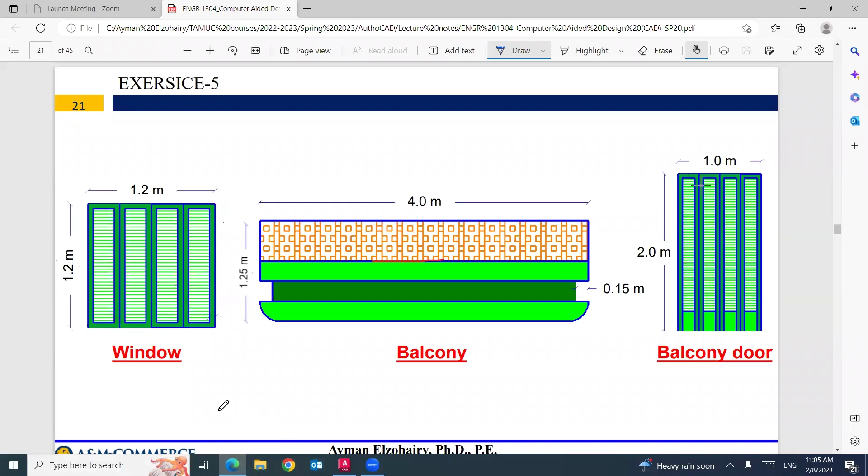So in the previous video, we learned how to use offset and mirror, and we drew this exercise. In this video, I will go through this front elevation of a building that consists of 5 floors. The first time you look at this drawing, it looks hard, or how can I start? But keep in mind, this elevation consists of the window, door and balcony that we covered last meeting. Do you remember?

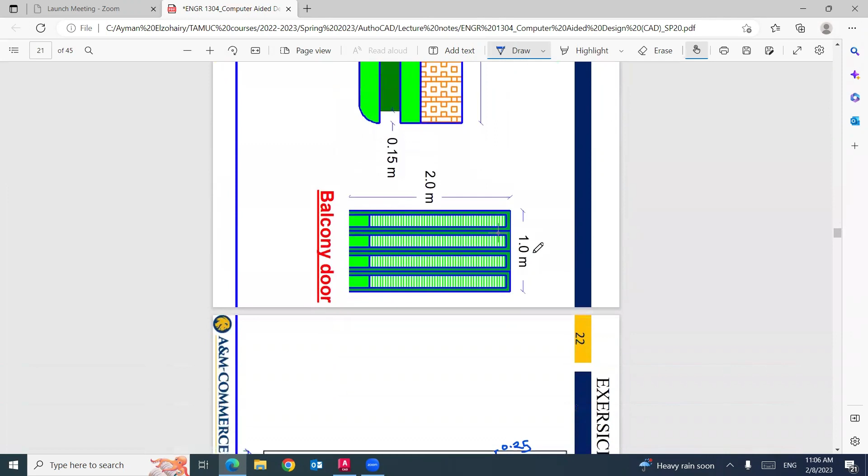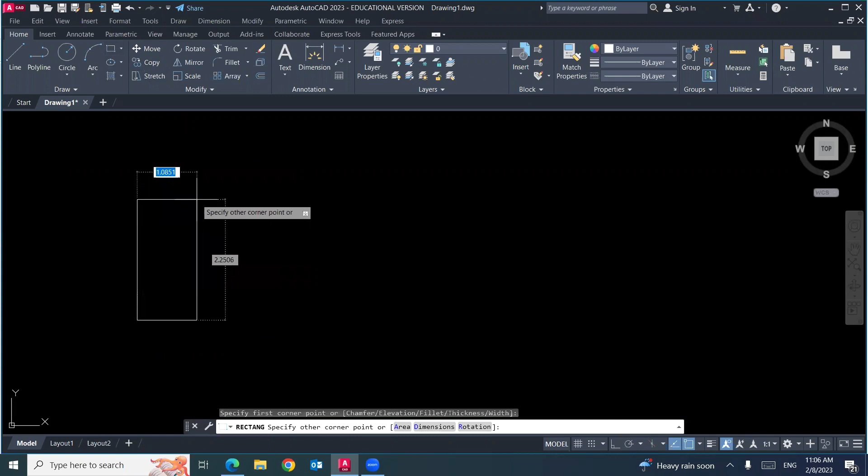In the previous video, we drew this one, this one, and this one. In this video, we will assemble them together. Just make the assembly, and we will create this final product. Let's do a review. Last meeting, we started by drawing a rectangle with dimensions 0.3 by 1.2. I did an offset for this rectangle of 0.05.

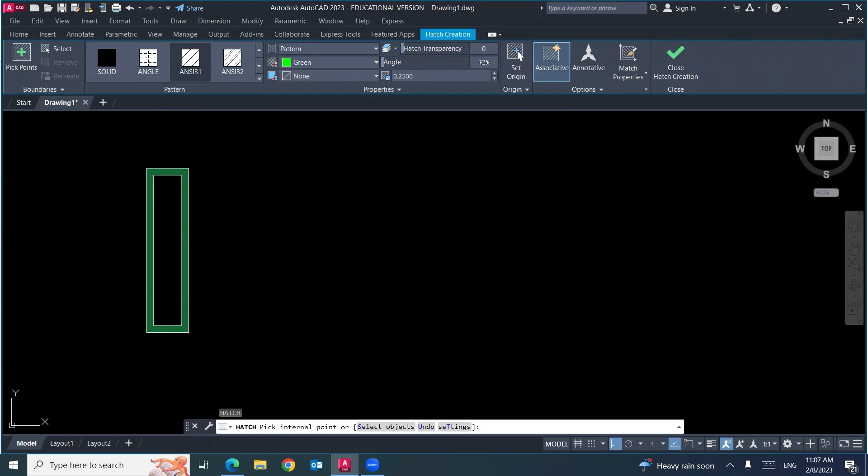I did a solid hatch with a dark green color in between. I did a hatch with inclined lines with a light green color and angle 135. There you go. Then I did copy or mirror. It's up to you how to create the rest of the parts of your window.

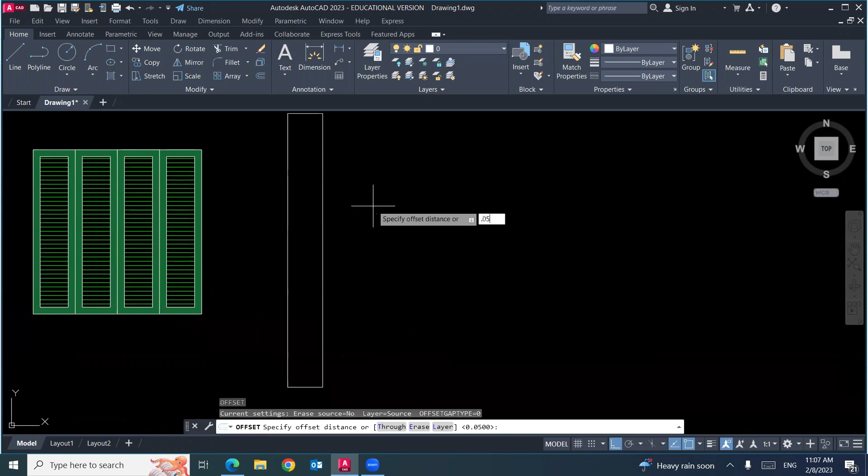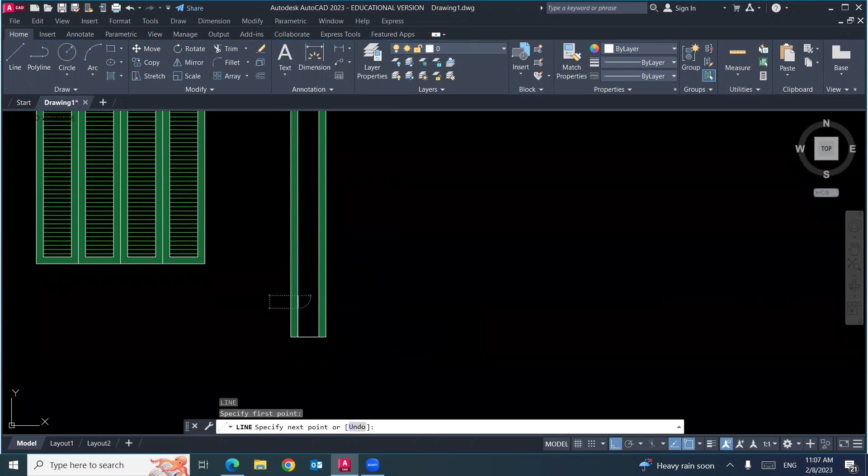That makes sense. I also drew a rectangle with width 0.25 and height 2 meters. I did offset 0.05. I grabbed this part down. I did a solid dark green hatch in between. And then I drew a vertical line here, 0.3, I think, then perpendicular. Hatch one more time, solid light green for this one.

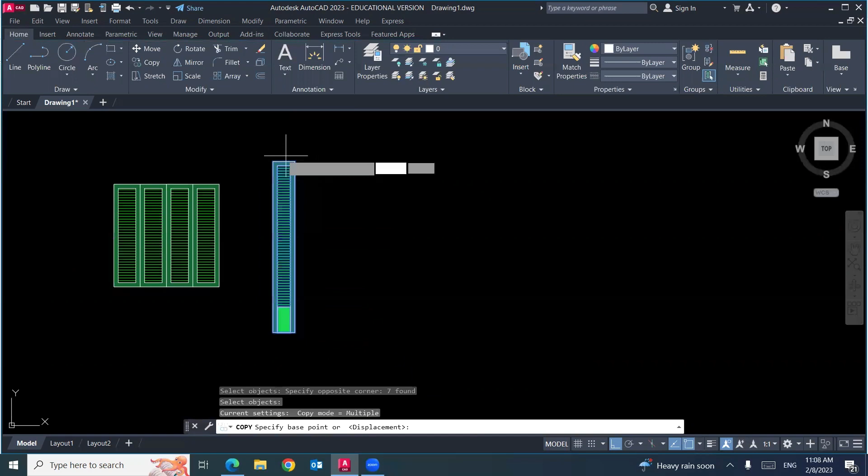Hatch, this is inclined lines, there you go. And I will copy this part 4 times. There you go. For your balcony, I will draw a line with a length equal to 4. I will do offset 0.5. One more offset 0.25 many times, 1, 2, and 3.

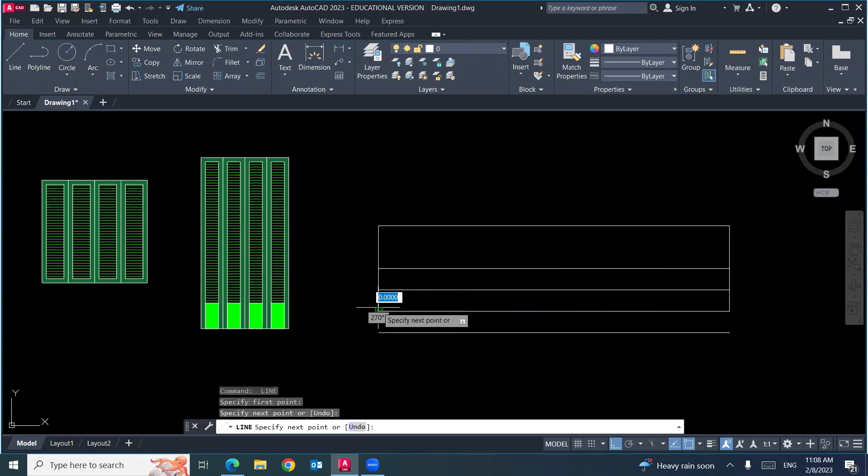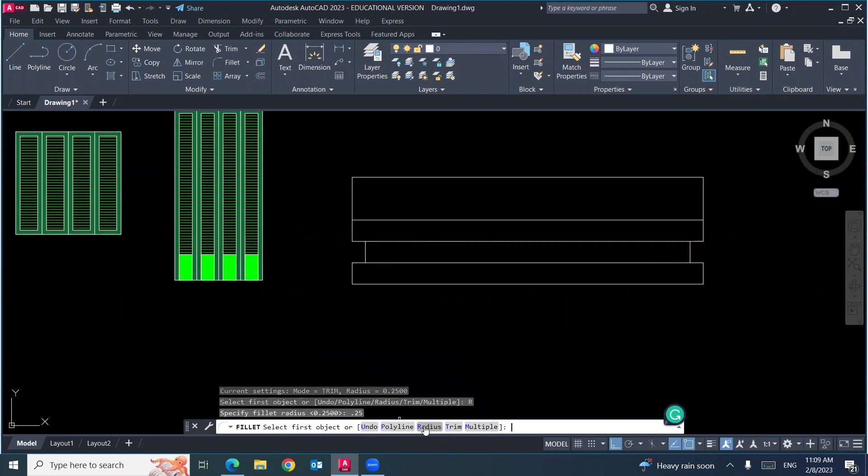I will draw a line until here, another line here. Then I will draw a single line, part of a line here and here, and I will do offset 0.50. Offset this side, offset this side. Then I will delete these 2 lines. I will draw a vertical line here, and fillet it with radius 0.25. I will fillet here and fillet here.

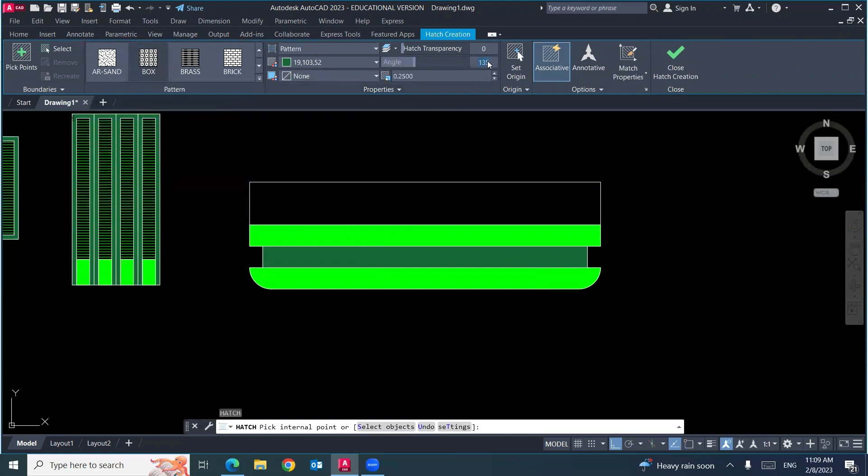Hatch solid. For this one, I can select 2 areas. So I click here and I click here and then enter. One more time, hatch with dark green in between. I will do hatch and I will select the hatch pattern box. I will keep the angle 0, scale 0.25, that's good. And I will change the color to brown. Looks good.

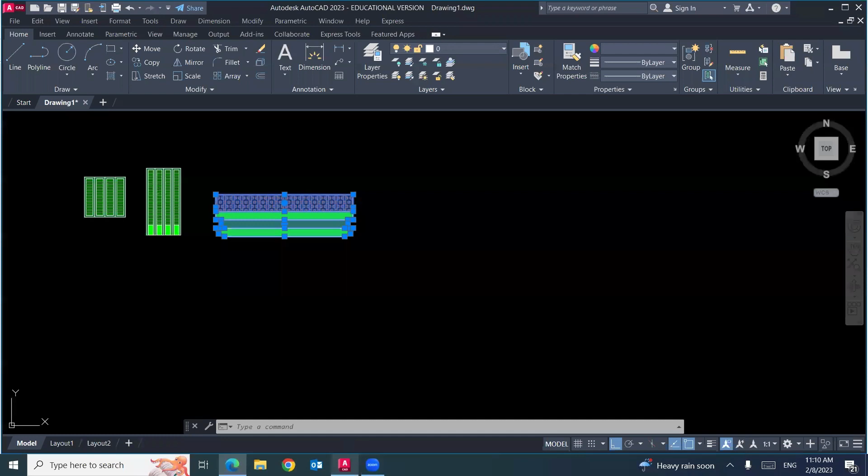Looks good. Guys, for this drawing, I need to draw another one. We have one here and we have another one here. The distance in between is 2 meters. We have different ways. One of them, I will offset this edge line 1 meter. So the distance between this edge line, this line I drew, and this edge is 1 meter. I did an offset for this line of 1 meter. But I said it's 2 meters.

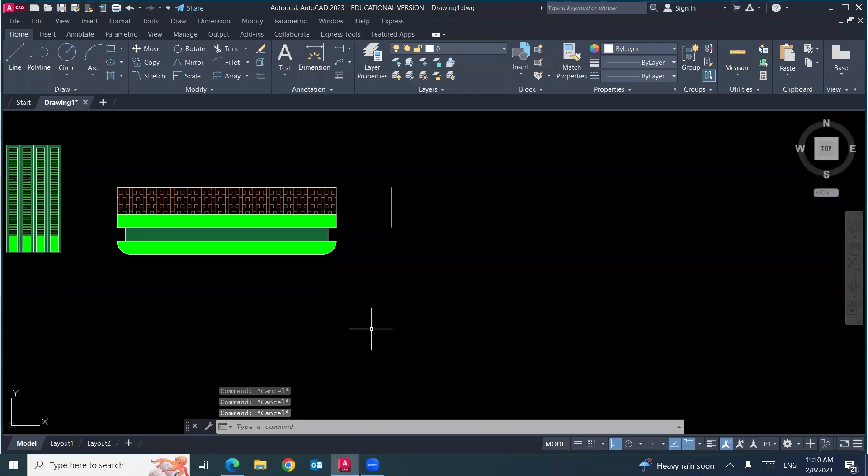Okay. I will mirror this whole object. Enter. The mirror line will be this one. That makes sense? So if this distance is 1 meter, this distance will be another 1 meter. So the total distance will be 2 meters. That makes sense? I did mirror.

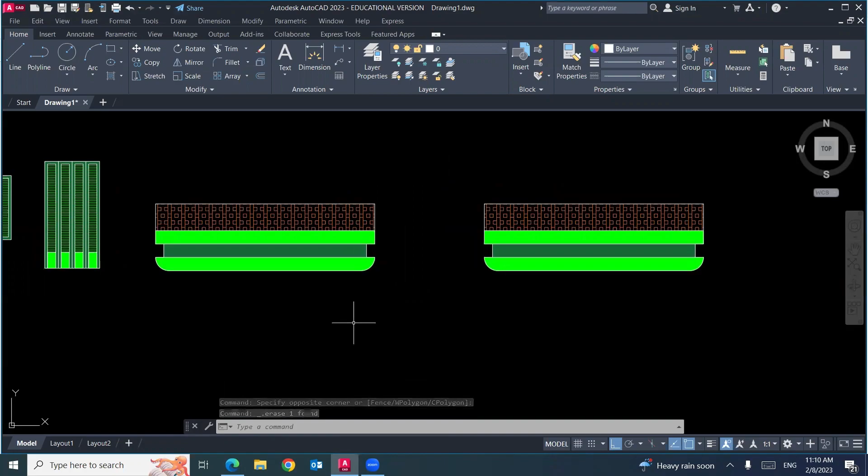In between this edge and this edge, I will locate the window I drew at the midpoint between the two edges. How can I do this? I will draw a line between this corner and this corner. We don't have a line here. Just a moment. I will move this window, and I will catch it from the base point at the midpoint here, and I will move it to the midpoint here. After you are done, delete the horizontal line.

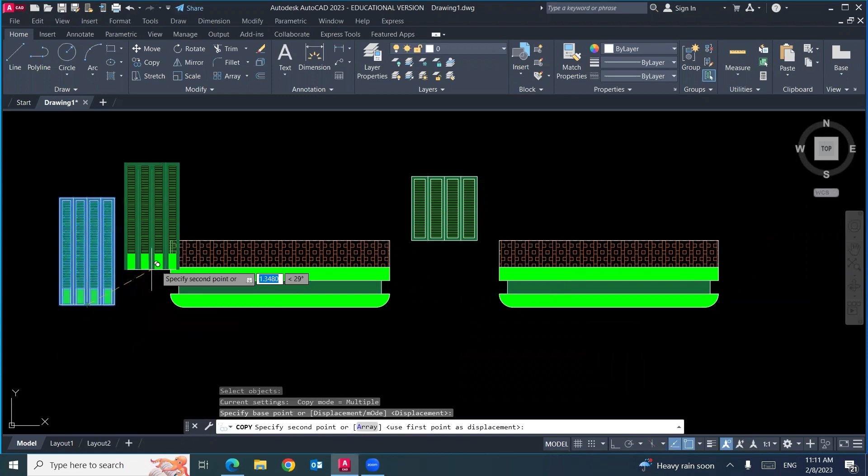I will do copy or move, but I suggest copy. For this door, the base point is here. I will put a copy here at the midpoint and another copy here at the midpoint. I will delete the original one. I don't need it anymore.

So what I did right now, I drew, or I assembled. I didn't draw. I assembled this floor elevation. If you look here, the distance between this floor and the next floor and the next floor is 3 meters. So I will do copy. How many? 3 copies. So I will do copy.

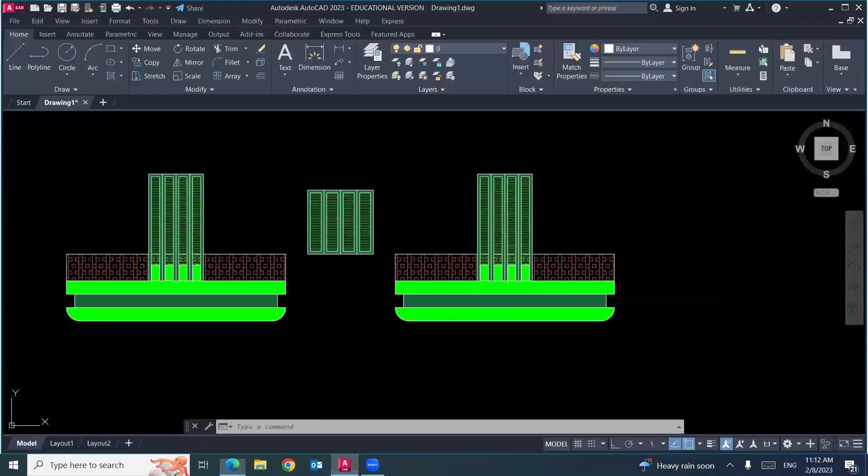Select all of them. Enter. Hold it from here, base point, and go up. Make sure your ortho mode is on to make sure it's vertical. 3, enter. 6, enter. 9, enter. 12, enter. Skip.

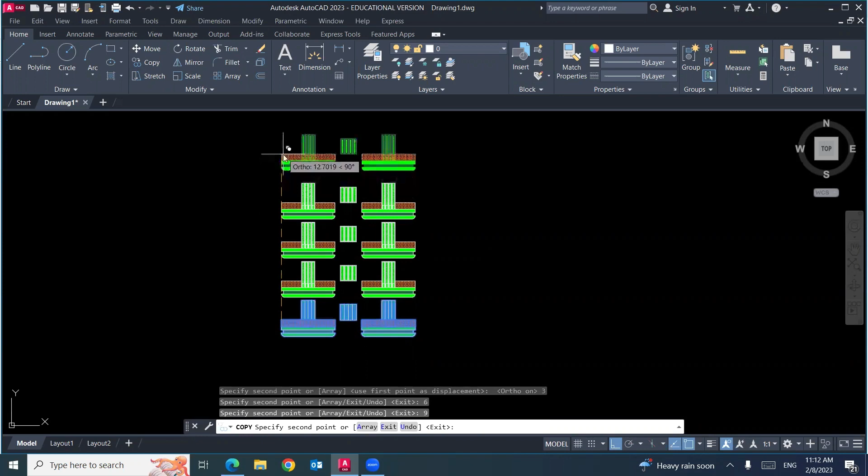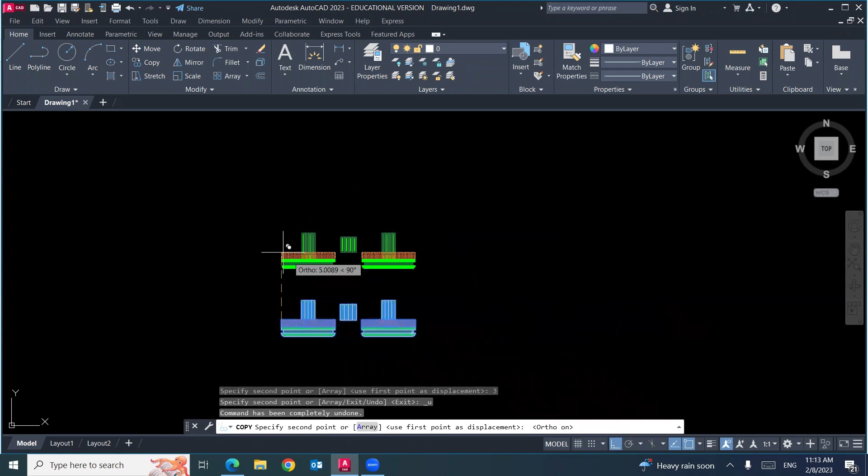I draw 5. 1, 2, 3, 4. It's only 4. That's fine. We can undo, repeat it, copy. From here, 3, enter. Oh, wait. Make sure the ortho mode is on. 3, enter. 6, enter. 9, enter. I'm done.

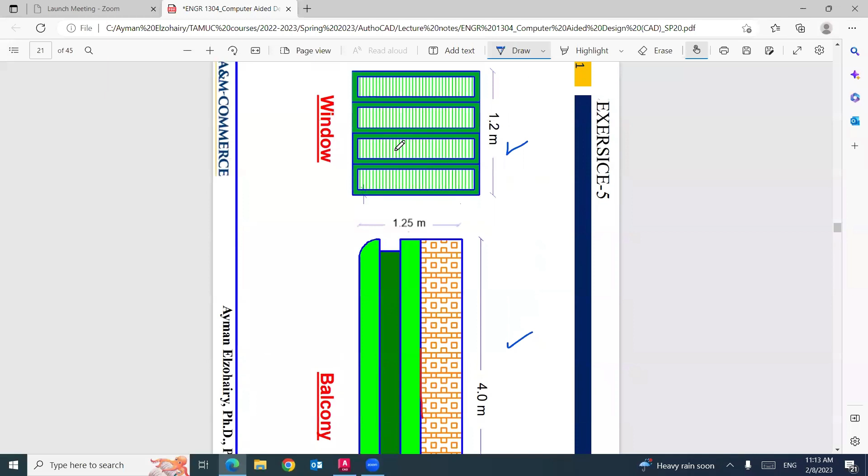Can you see? So if you go here, wow, looks beautiful. It's very simple. This drawing just only comes from the previous video. I draw a window alone. I draw a balcony alone. I draw a door alone. And then I assemble all of them together. What I did for one floor will be repeated.

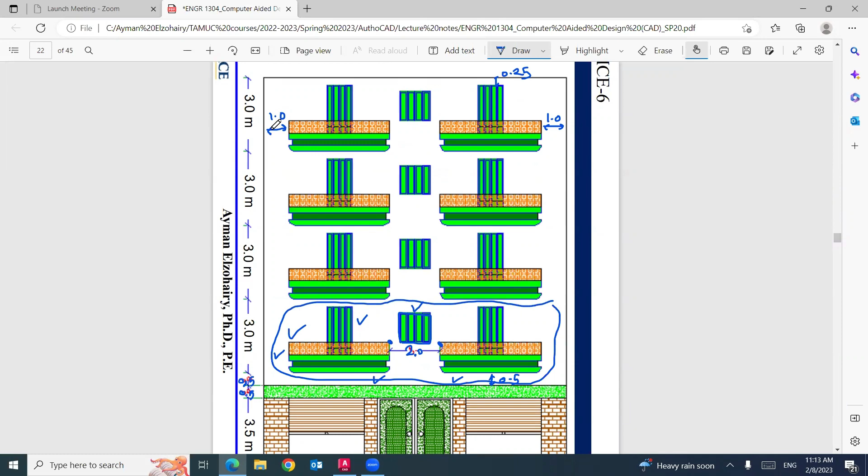So I did copy. Keep in your mind the edge of this front elevation, 1 meter from here, 0.25 meter, 1 meter from here, and the total height from this edge to this edge is 0.5. I can do it very easily. Offset 1 meter from this side, 1 meter from this side. Offset one more time, half meter from this side, and offset 0.25 meter from the top.

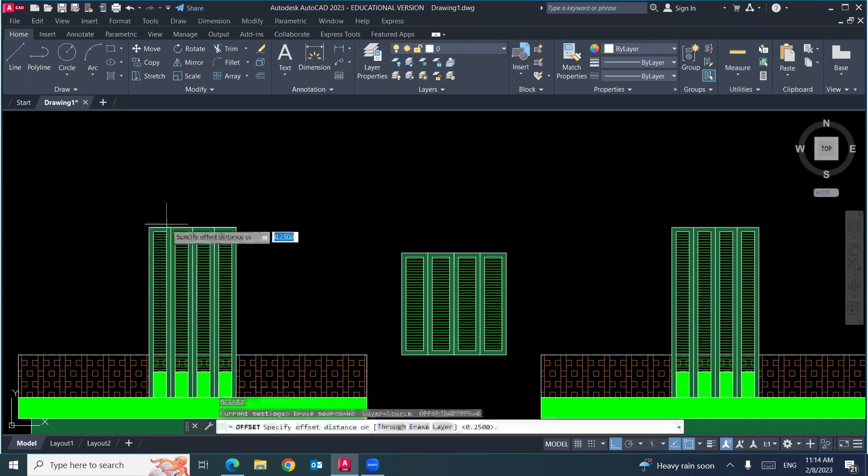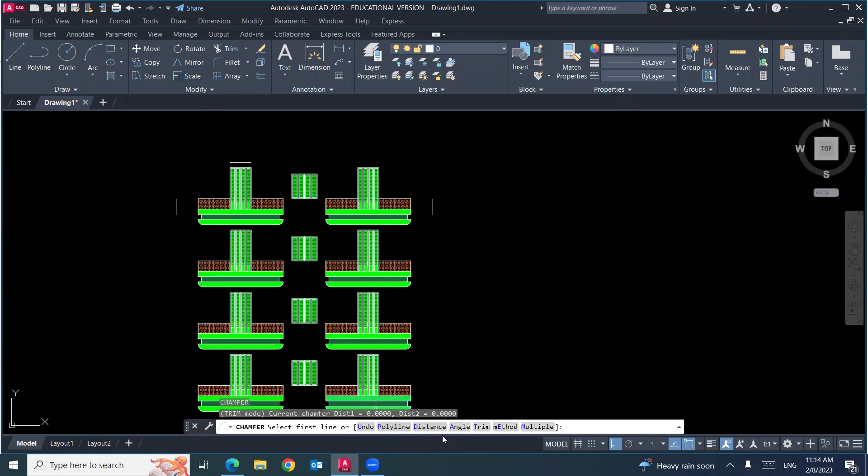We don't have a line here, so we can draw a line to make offset for it because it's drawn as a rectangle. That's fine. Okay, looks good. I draw the edge lines. But how can I connect them together? Chamfer. CHA. Chamfer. And your distance 0, enter, 0, enter.

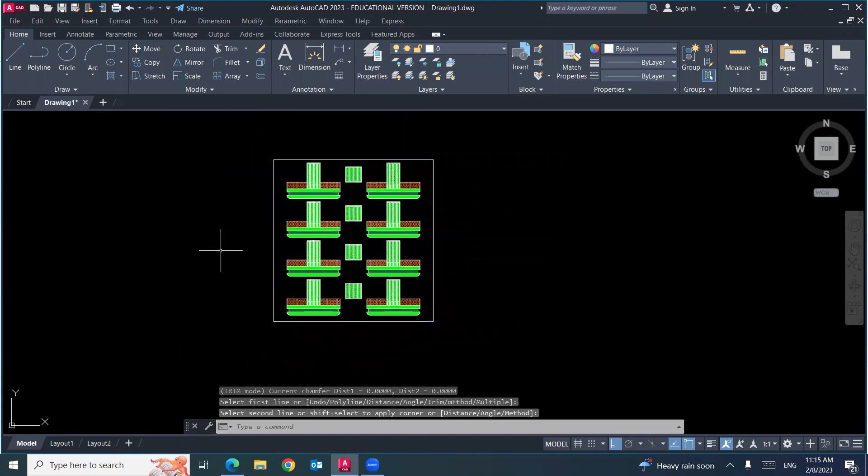If you make chamfer between this one and this one, both of them will be extended. If you make chamfer between this line and this line, here you go. So I kept the distance here 1 meter, the distance here 1 meter, the distance at the top 0.25, the distance at the bottom 0.5.

Let's focus on the bottom floor. I have this line, I draw it. I have another line with a distance 0.5, another line with a distance 3.5, another line here with this little distance 0.25. So I will do offset 0.5, 3.5, 0.25. Offset 0.5, offset 3.5, offset 0.25.

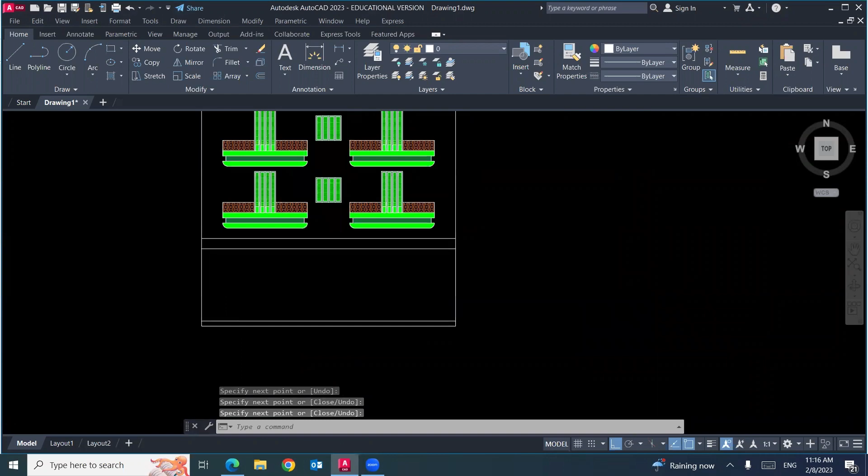Then I will draw the vertical lines. I will draw vertical lines one by one. Okay, there you go. So this vertical line was offset from this line by distance 1 meter. So offset 1 meter for this line. The same here, 1 meter.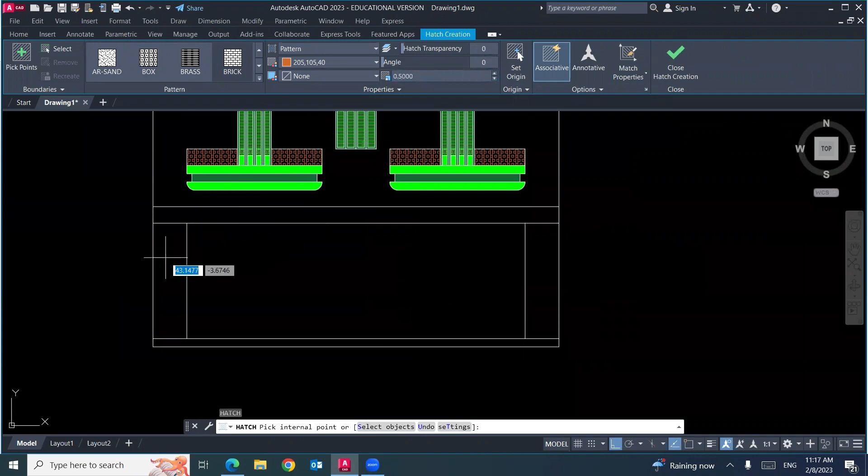Then I will do hatch, brick, the brown, your angle 0. Let's try. Looks good. I will increase this scale 0.5. Make it bigger. Looks good. I will click here and click here. We are done. This side and this side. I will do offset, another offset 3 meter.

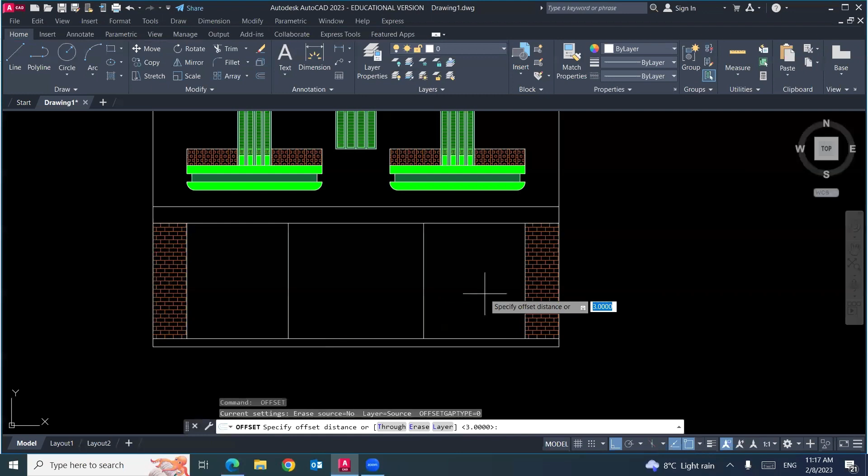And then 3 meter. We can draw it 3 meter. Yes. And then 0.5. You can assume any dimensions. It's not a big deal. 3 meter. 3 meter. And then 0.5. I will do another brick here and another brick here.

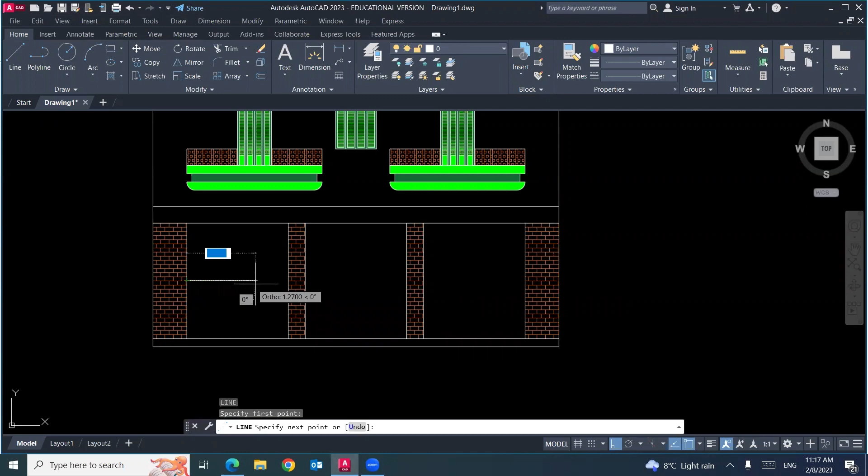We have here a garage door, open the half. So we can just draw a horizontal line like this, make offset 0.1 like this, and then hatch. Your hatch will be the inclined lines, and I will adjust this angle 135. Let's try. Looks good.

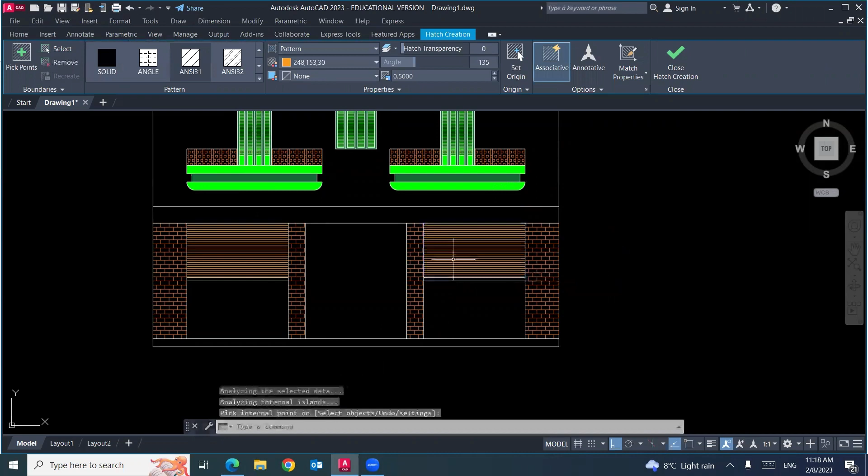If you would like to change the color a little bit. The same here, line, offset 0.1, hatch, everything is the same. Looks good. And this bottom part of the drawing looks like it's the shoulder in front of the building. So I can make it hatch.

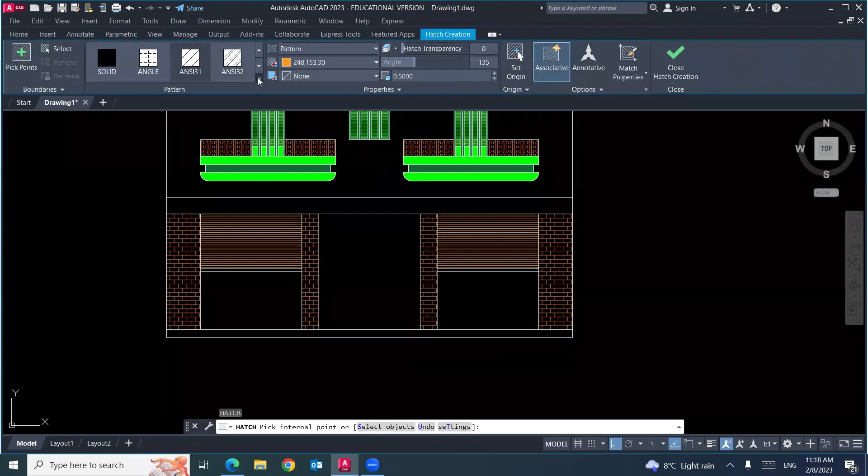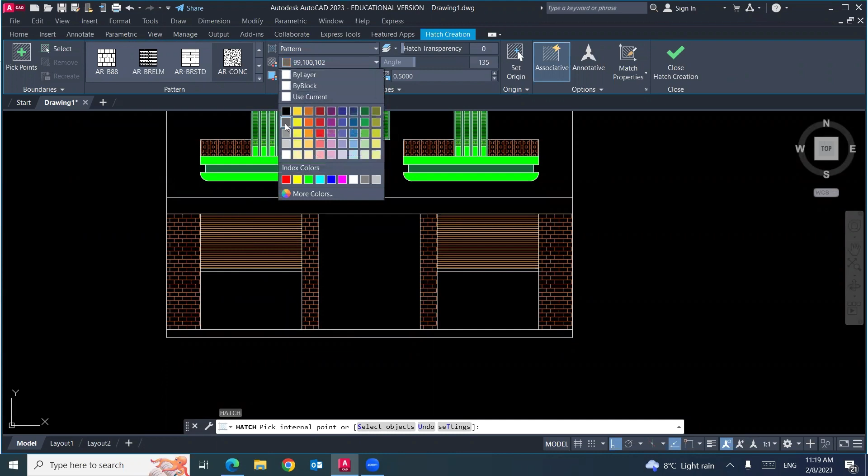And we have here stone. I think we have a stone. No? We should have stone or concrete. We can use concrete. That's fine. And we can change the color to be this one, and your scale will be smaller. Let's see. We can make it smaller, more, 0.01. Let's see. Here you go. Looks good.

Then you can draw this main door. It's up to you. We can draw something like this. This 1.21. Okay, I can try this one. Offset 0.1. Oh my goodness. How can I adjust this? Chamfer. CHA between this line and this line, everything will be adjusted. I am done. I will draw a vertical line here.

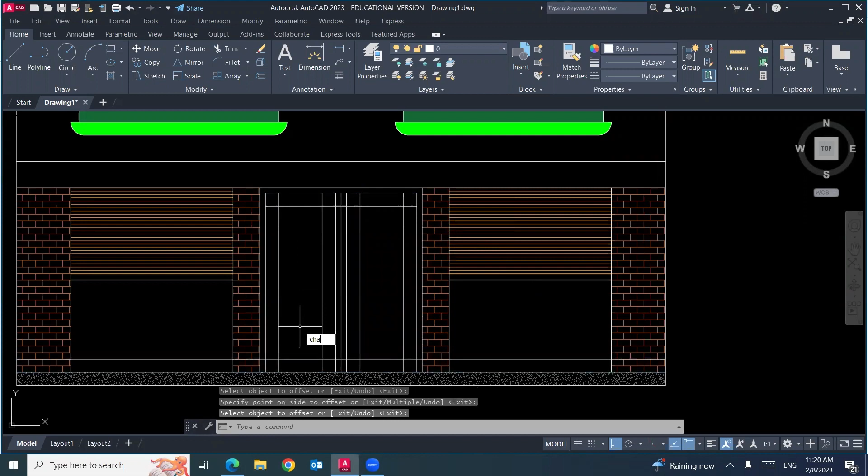Midpoint, and I will do offset 0.1 on this side and this side. Then we can do another offset, 0.25. This, and like this, like this. Oh my goodness, what happened? I can do chamfer to adjust everything.

No? So I will do offset one more time. Chamfer can make these two lines only, these two lines. Also, I can make fillet, the radius can be 0.25 between this line and this line. If you would like to make it bigger, that's fine.

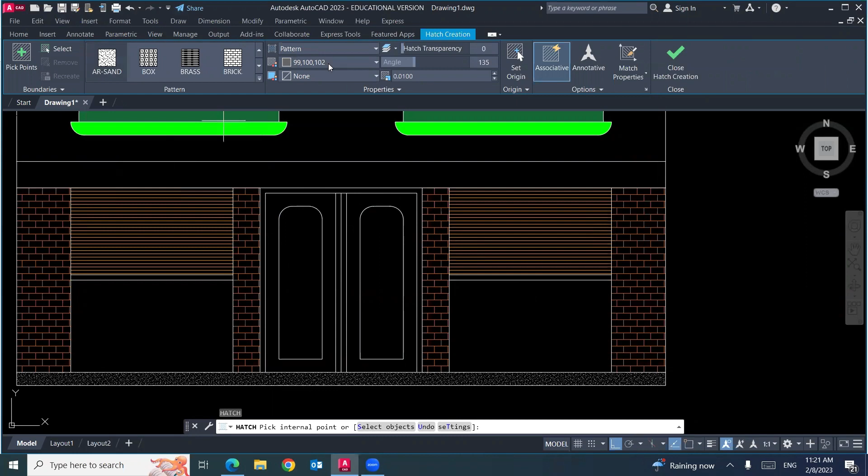I can make hatch for sand. We have here sand, I think. Where is the sand? There you go, this one. And your color can be blue, this shape, and this shape. That makes sense? I did not follow this exactly, but you can do what you want.

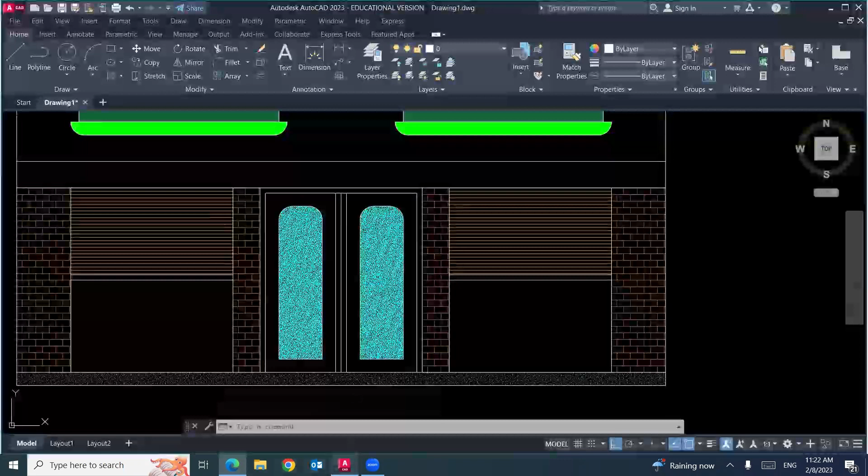Also, I can make hatch for the box. Your angle would be 0. Your color can be brown for the part outside. Oh my goodness, the scale is very small, so I will increase this scale a little bit. That makes sense?

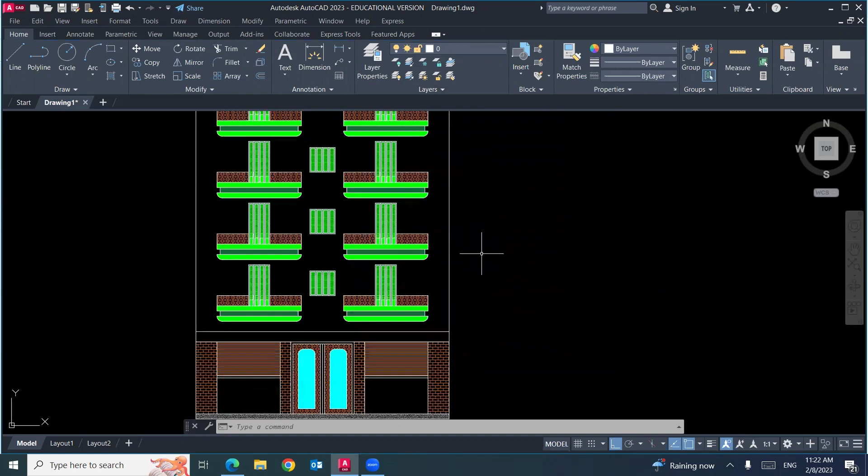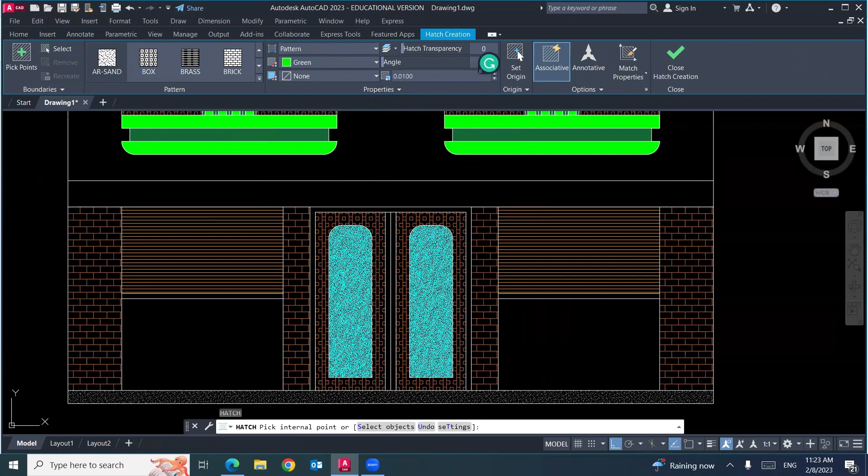Also, I forget to make hatch here. We can make it like sand, make it green. Your scale make it smaller, like this. Looks good. I can extend my drawing to be better.

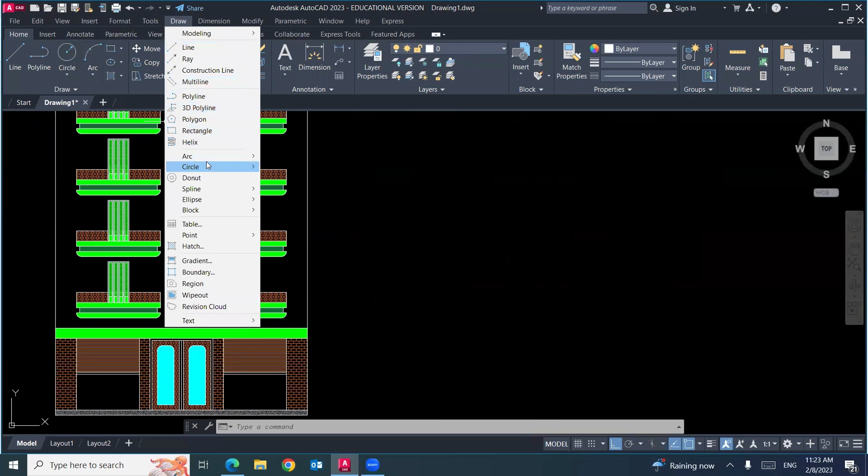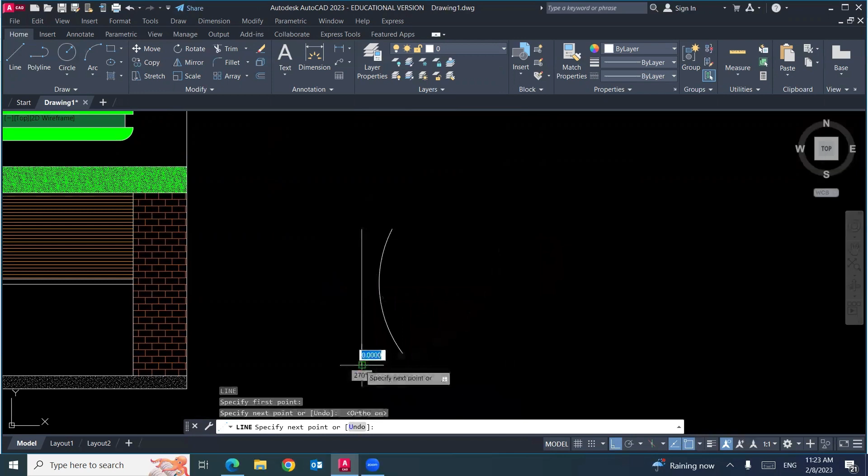Do you remember arc, draw, arc, 3-point? I can draw arc like this. Make your ortho mode off. What do you think about this arc? Just a 3-point. And I will draw a vertical line here. And I will draw mirror for this arc about this line.

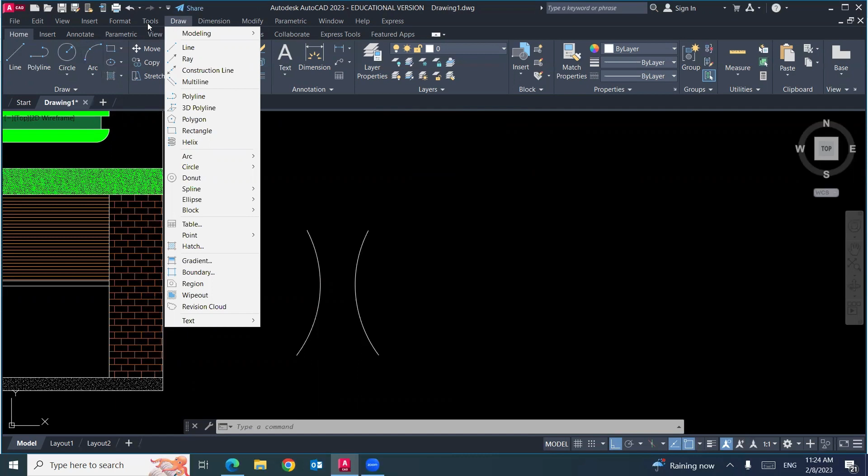That makes sense? So then I will have another cloud, not from here, probably, I cannot remember. Draw. Yes, we can open this little arrow and we have here many options. One of them is the cloud, freehand cloud, like this. Just click everywhere.

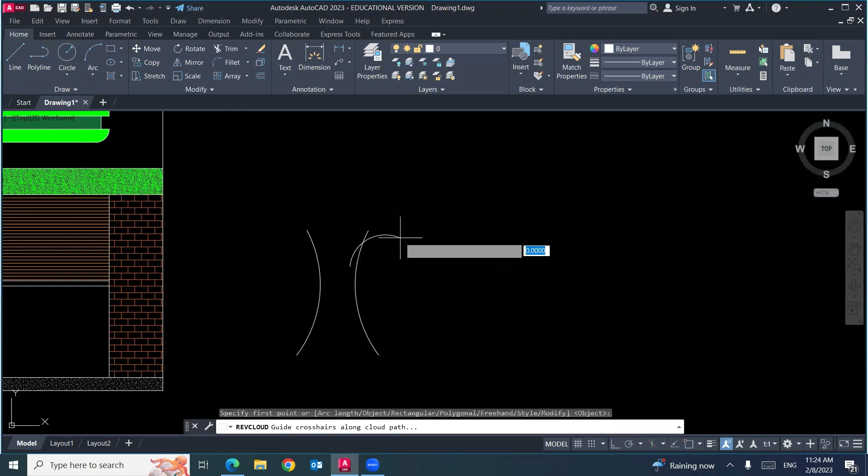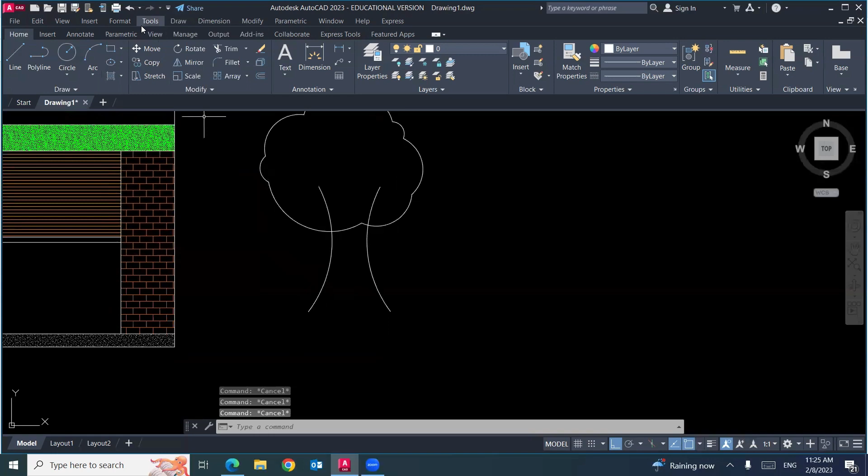That makes sense? So how did I get this cloud? From this little arrow, and I have here this freehand revision cloud. If you cannot find it, just open this little arrow one more time. You can find the freehand. Okay. After you are done, I can draw another arc, 3 point, one here, one here, and one there.

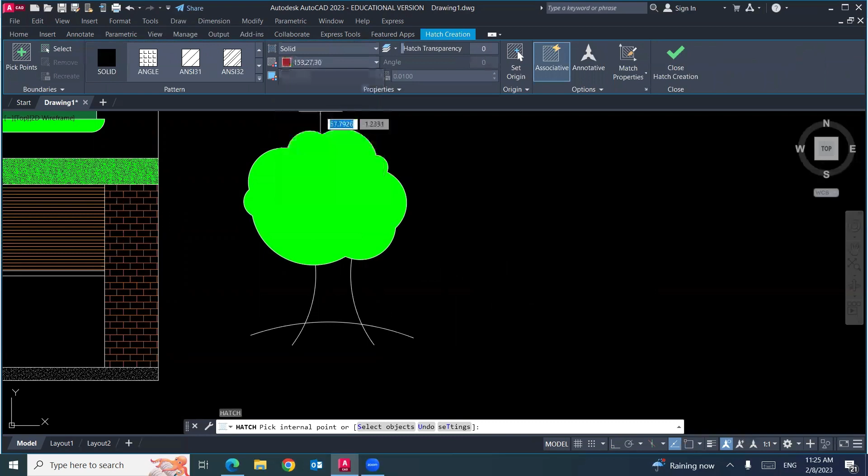So I will do H, enter, solid, light green for this one. I can do H, brown for this one. What do you think? I can do copy for this part and the other. I can move it if you are feeling it's a little above, so I can move it here. What do you think?

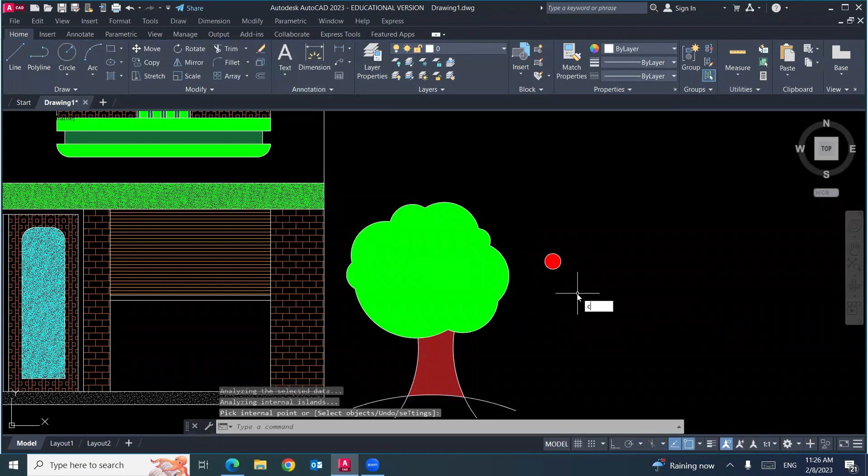If you would like, I can draw a circle and I can do H solid with color red, and I can do copy for this circle with the red to make apples. Just for fun. There you go. So what we learned so far in AutoCAD will enable us to draw anything. Hatch is very important.

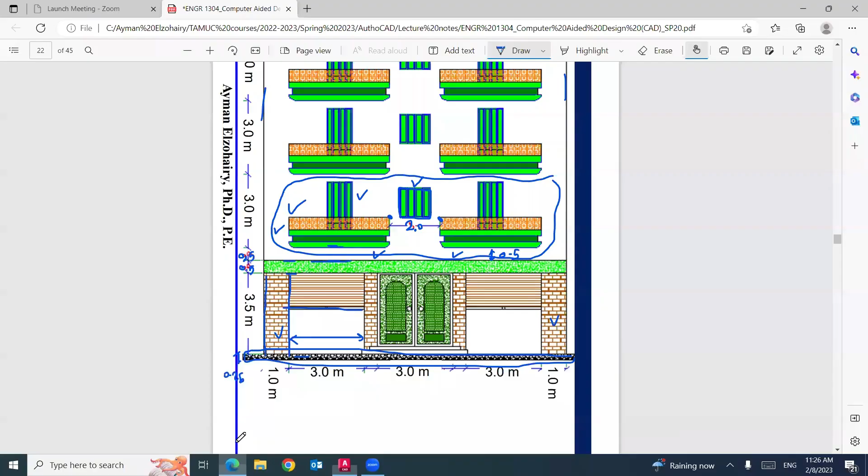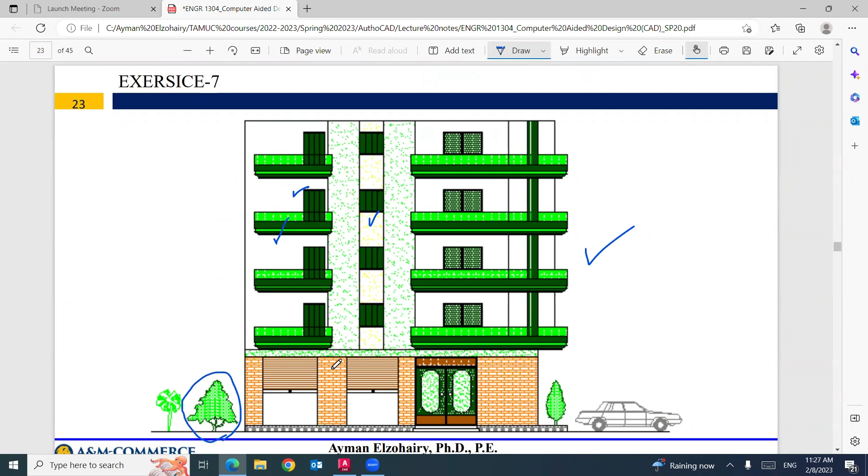So now you can go back and draw this exercise. It's very simple. Door, balcony, window, just hatch. And then you can complete what you want. And this tree, you learned how to draw it. And also this exercise. That makes sense? So all of these exercises can be done part by part, then assemble all of them together, and then use your hatch command to complete what you are looking for.

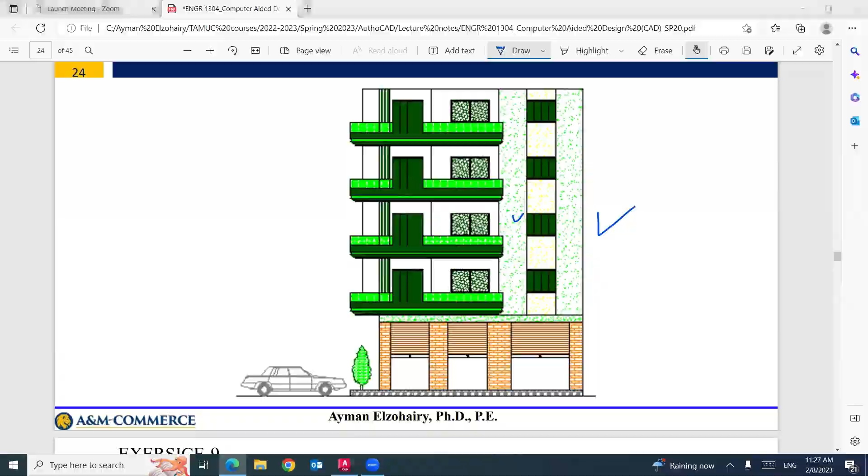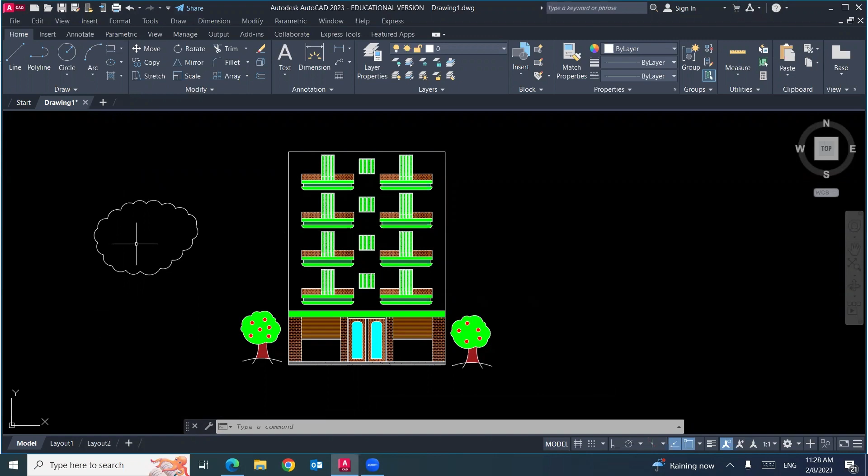I can continue how to draw a tree one more time. You need only draw arc with 3 points to draw a curve. This little arrow, you can open it and then find freehand revision cloud. Once you get it, we need just to click everywhere, click, click, and then close it. It will be closed automatically. Then you can make hatch with any color, but the tree is green. And then you can put circles with different colors to make fruits, and then you can finish up your tree.